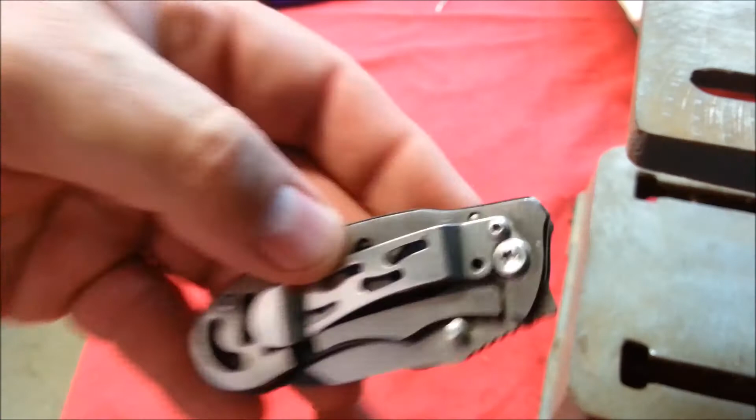We're going to have to make one of these itty-bitty fasteners. Our Through the Week project on the Crafted channel is replacing this fastener. It was stripped out and I've since lost the fastener, and I like this clip. I like using this clip to put this knife on my pocket. It's nice to access from outside without digging around in my pocket.

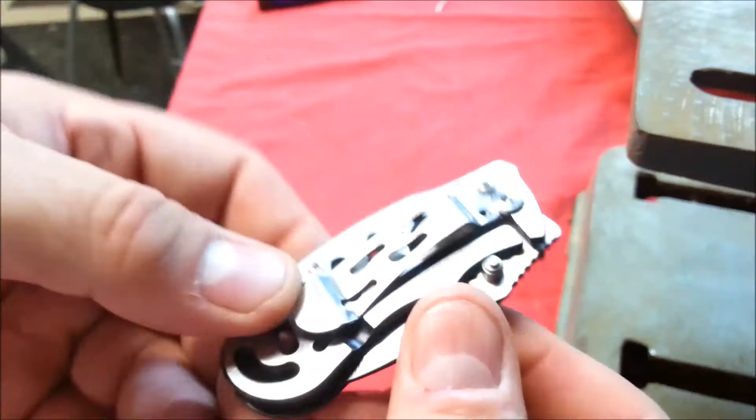But before we can start this project, it's cold in here. We're going to have to warm the shop up.

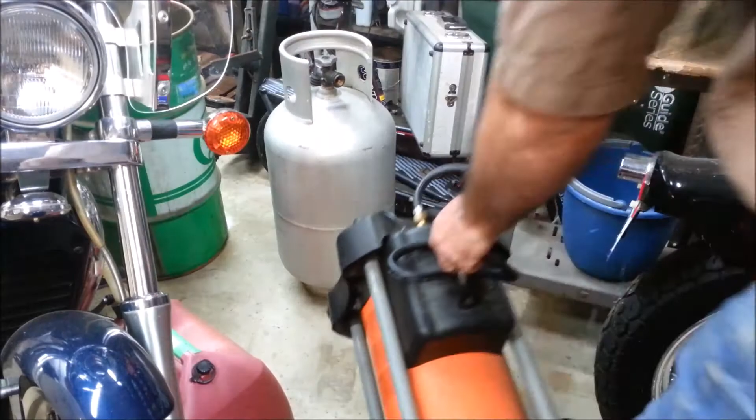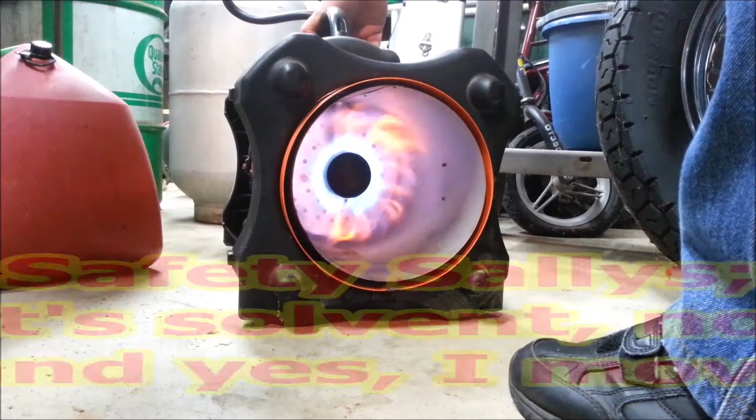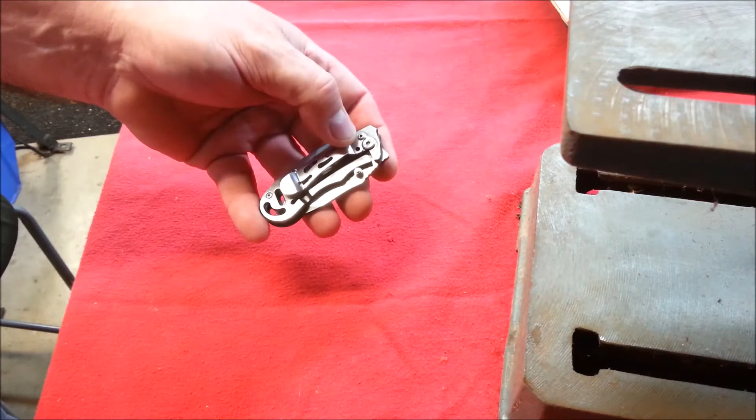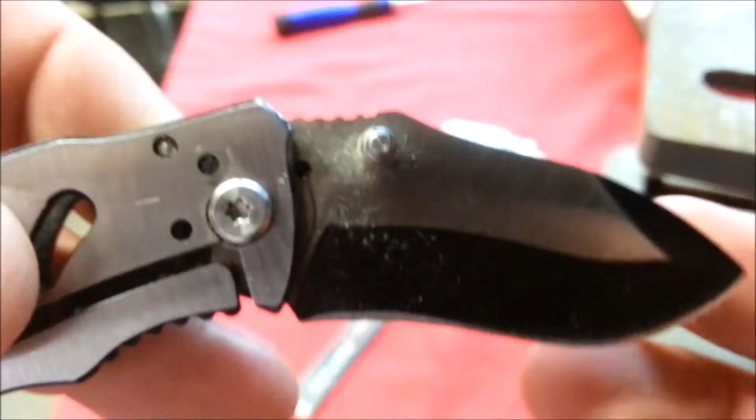Today, we're going to fix this knife, stripped out screw. We're going to have to make one of these itty-bitty fasteners. And I'm going to make the fastener out of this 4-40 button head machine screw. We see on the knife that the blade passes in front of the holes. So we can't have the fastener protruding through the scale of the knife where it might interfere with the blade.

The good fastener that we have is a 2.5 millimeter fastener. The English diameter of this thread is 0.095. I plan on replacing it with this 4-40, and we can see that it is 110, 111 thousandths. We have another issue here, and that's head size. The head on the 4-40 button head is 200 thousandths. The head on the stock fastener is 155 thousandths.

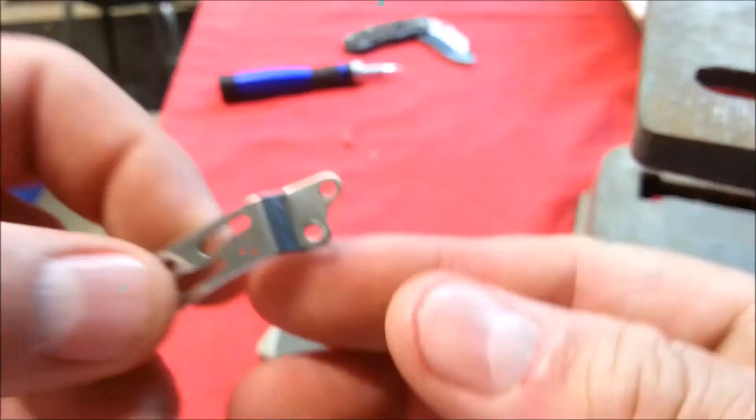Where the head diameter comes into play, the good thread that I have in the good fastener goes in this hole, and this hole here is where the 4-40 is going to go. And that head will hit this break or bend in the clip. So we're going to have to grind down the diameter of the head.

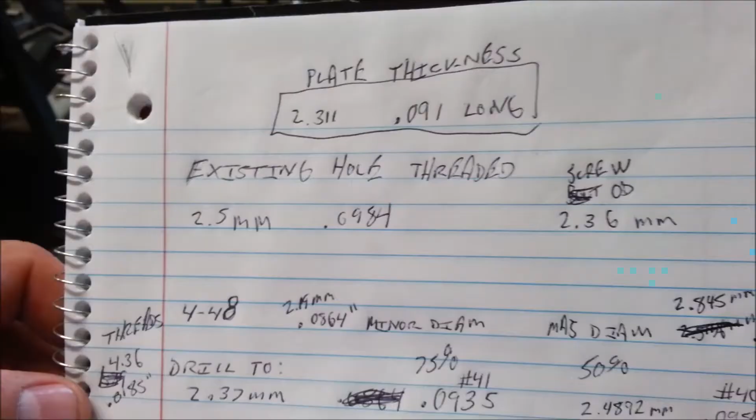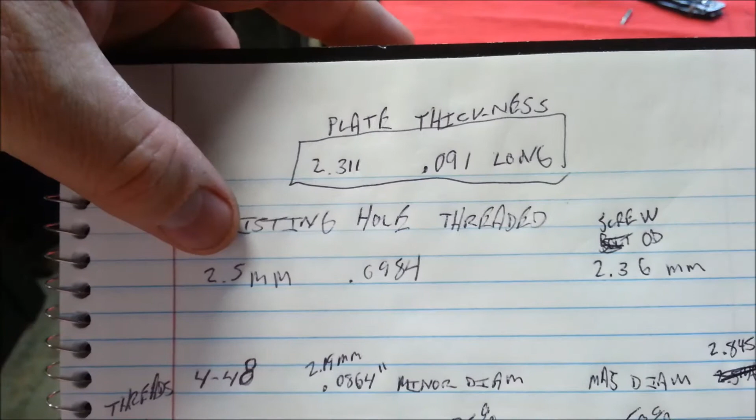Some things to consider when replacing a stripped fastener. Since we're going to be drilling the hole and making it larger, we need to take some measurements of things and figure out what sizes are available to us. The existing fastener, 2.5 millimeter, requires a tapped hole of 0.0984, and the screw OD is 2.36 millimeter.

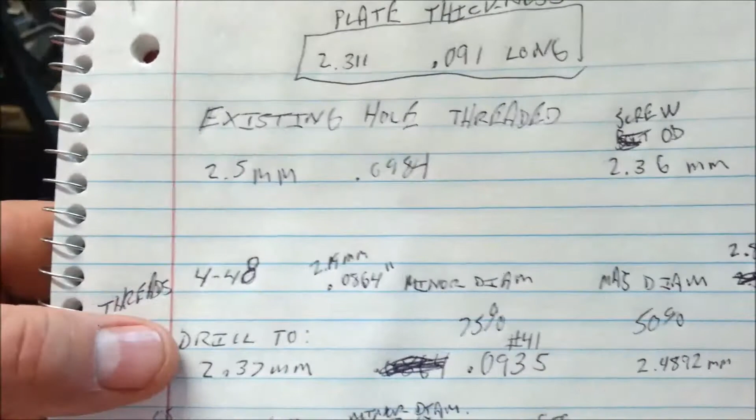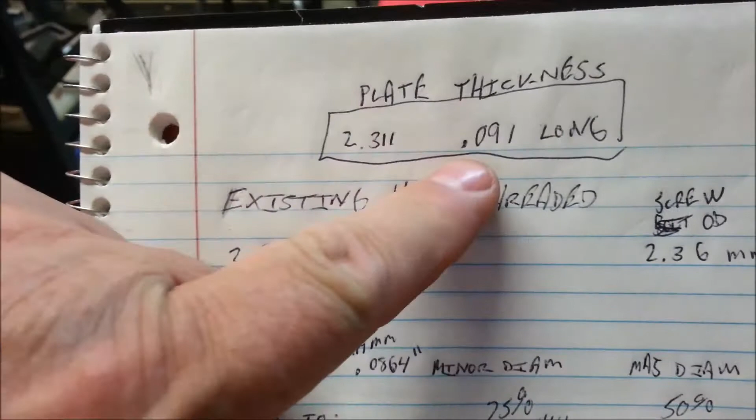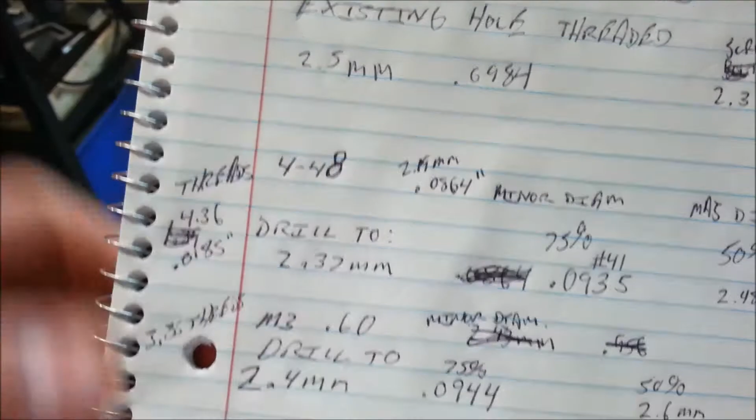Now I looked at 4-48. This would have been a great one to use. I would have had 4.36 threads in the thickness of the plate, which is about 0.091, and about 18.5 thousandths thread engagement. But a box of those is about $9. So the one I decided to go with was 4-40.

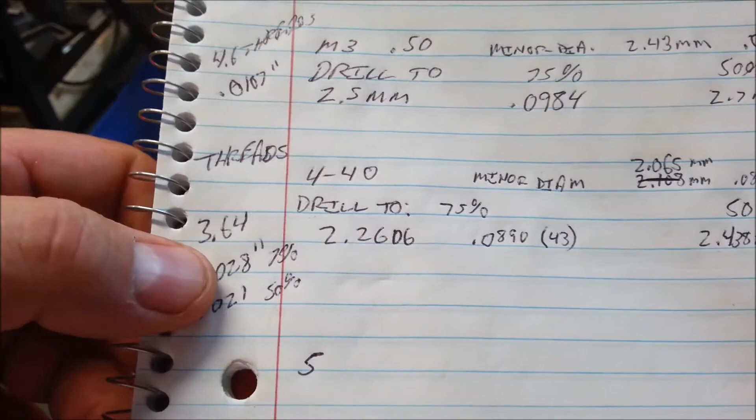This requires a 0.098 hole to be drilled, but we're really dealing with a fastener that's about 0.094, 0.095 in diameter, so I'm going to lose about 6 thousandths of this thread engagement. But that's going to leave me 22 thousandths of thread engagement, about 10 thou a side, so I ought to have a real good bite out of a 4-40. And the thickness of the plate, 0.091, there will be 3.64 threads, which I think will be pretty decent. I should be able to snug it up and not have the clip come loose.

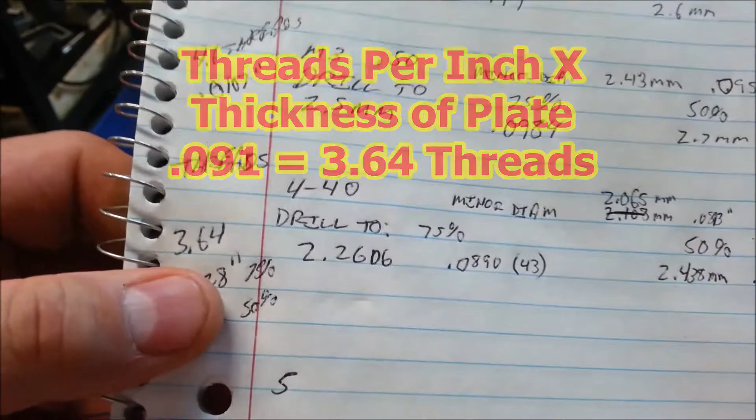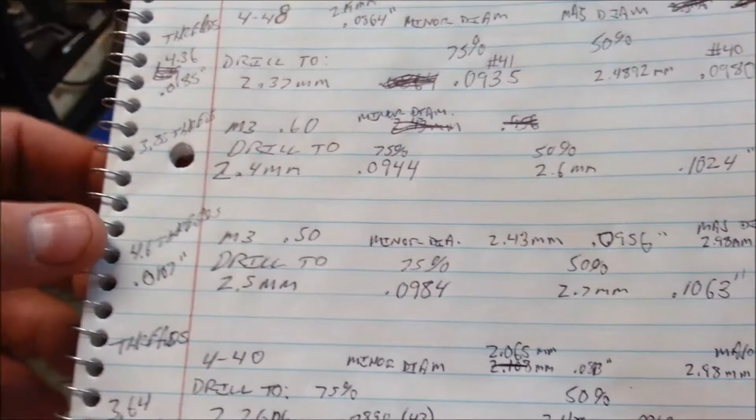Now this might seem like a lot to go through figuring all this out for a knife, but I wanted to do it right. And if you were fixing something that was really expensive and not a $20 knife, you would want to do it carefully and figure out your hole size, the hole size that's there after you drill out the threads and all that stuff in order to pick a good fastener. So here we're going to do 4-40.

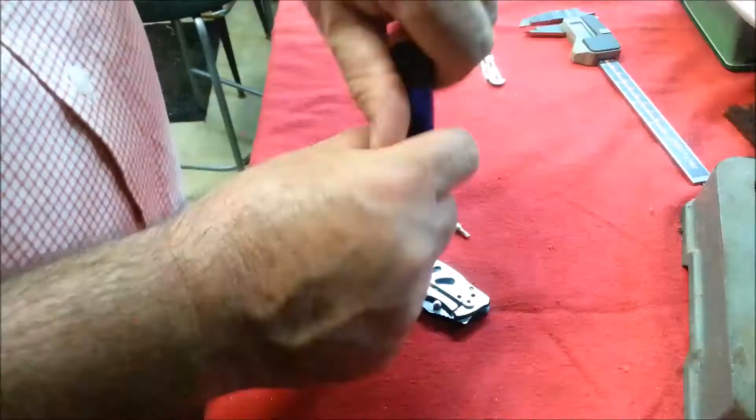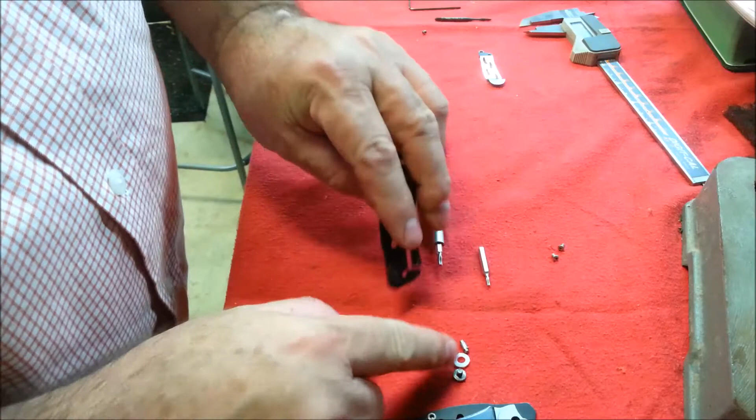So hopefully I can get this apart and back together without stripping any more threads. These screws here are actually in a spacer that's between the scales. Don't want to lose any of these either. And likely the reason this failed is crappy Chinese threading. Possibly an undersized fastener or an overcut thread in the material. Don't want to lose any of these spacers. These little nylon washers, so we'll be careful with all of that stuff.

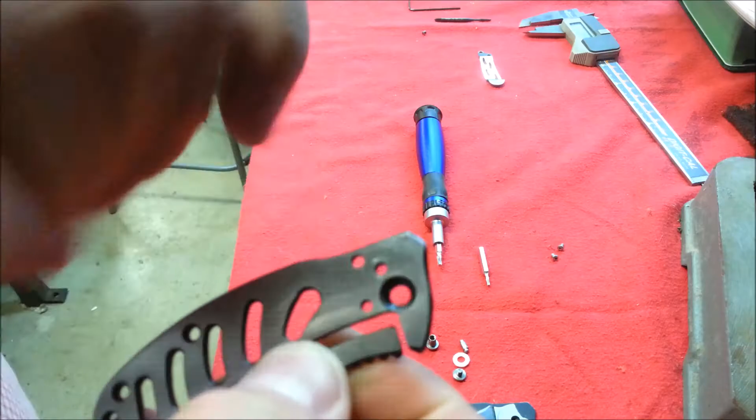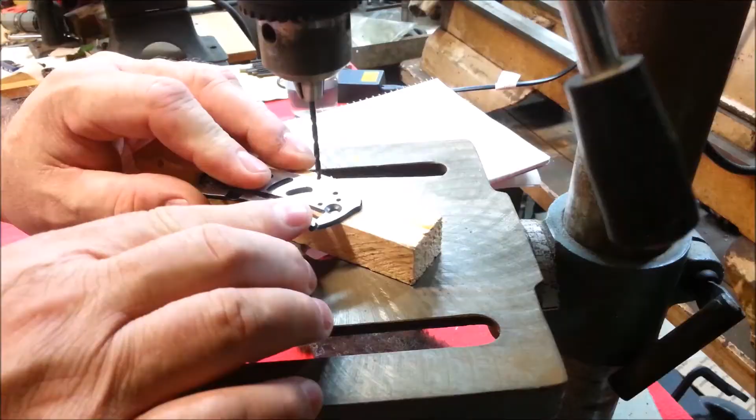And now we have out the piece of material we're going to be working on. And here's our bad hole. The 4-40 thread requires a number 43 hole be drilled. This is a number 43 bit. Raise the table up. I'm going to let the lock hang over the side here. I'm going to drill this carefully and slowly. Let it float a little bit to center.

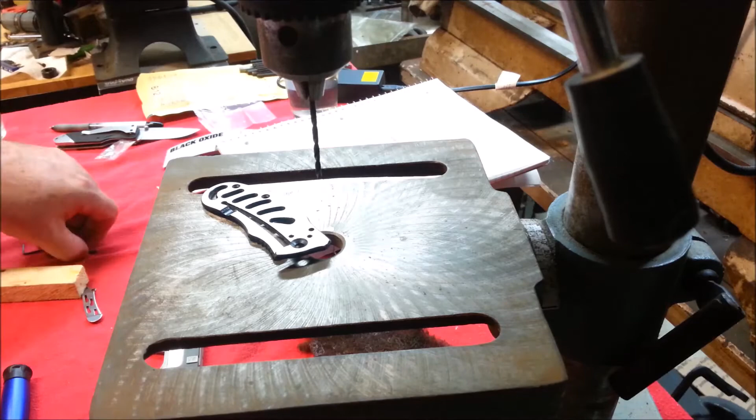We took hardly anything out of there. Almost nothing. But then again, when the screw stripped, it would have pulled metal out. It would have pulled the existing threads out of there. I'm going to install the 4-40 tap. You got to be very careful with small taps. They're very easily broken.

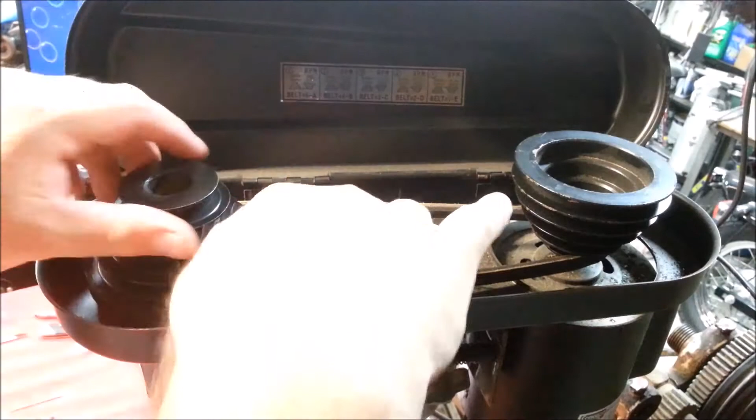I'm going to remove the belt because I'm going to just be turning the spindle by hand. I don't want a power tap with a tiny tap. That would be bad news. So here we can control it and be nice and careful.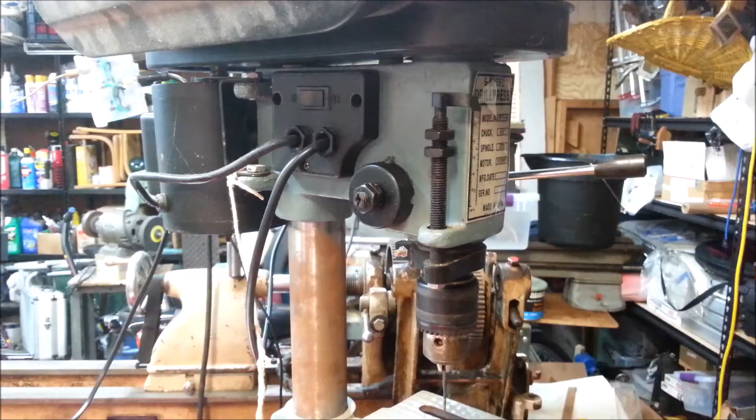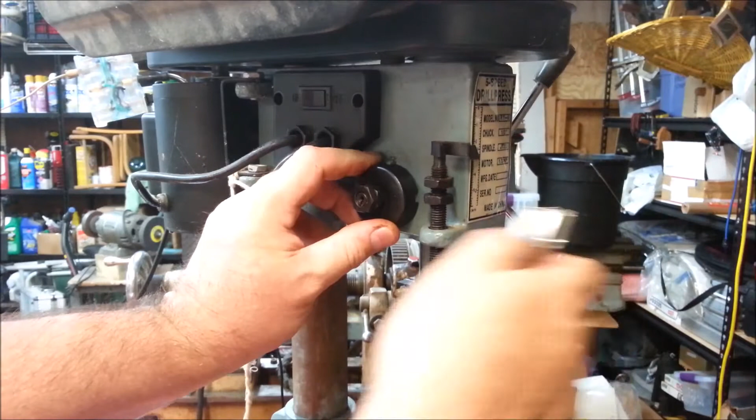I've decided to loosen the spring that causes the quill to return in the up position, so I don't have to fight with that. I could just adjust it very soft. There we go. I'm going to leave it right there, which leaves the quill. And let's put a little more tension on it. There we go. That's got it floating just above our work.

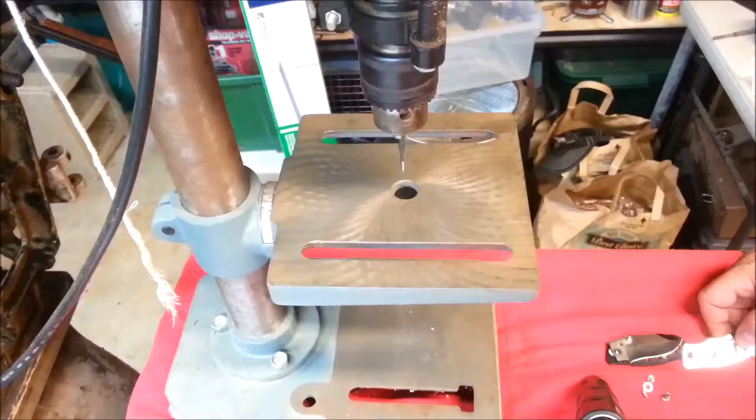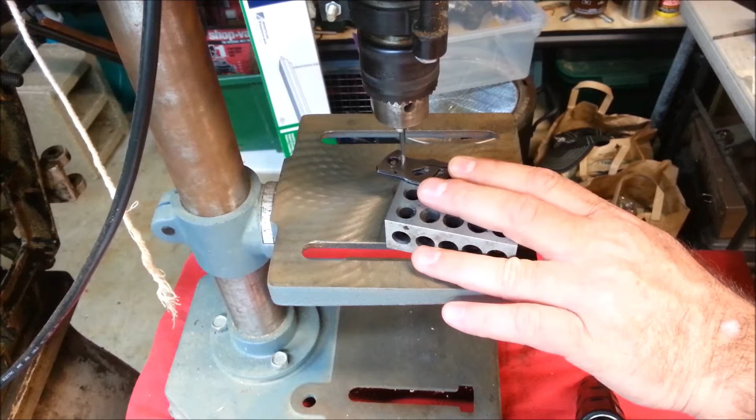I've decided to change away from the wood to one of my 1-2-3 blocks, which is a much nicer tool, and I'm going to do the tapping overhanging the block. I'm going to let the part float so it centers, and then I'm going to turn the quill with only very light pressure on the crank. I felt the tap winding up, so I'm turning it back to cut the burr off. It's very easy to break a small tap.

Tighten the chuck up. I mean, I wouldn't want it to slip in the chuck, would I? May regret that. There we go. Cut the swarf. I'm not even going to go a whole turn. Well, she does want to slip in here.

And by using my small shop drill press to hold my tap, I can be more assured of a good square hole. You could do this by hand, of course, but it would be hard to do it as straight. Wow, that's just all the force I dare put on that.

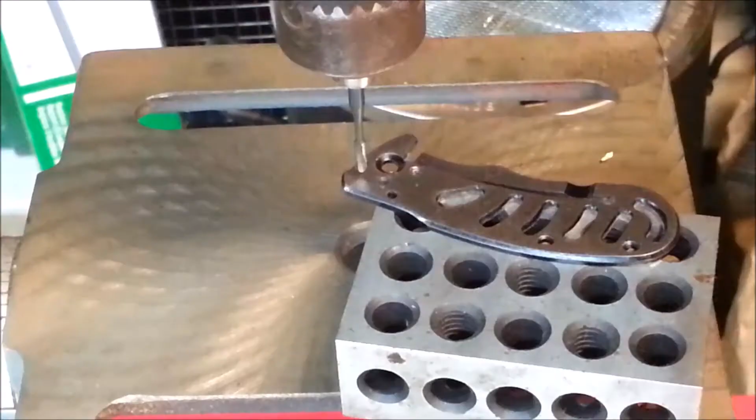Got the first tap back in here. And using a drill press to do this is another factor in not breaking the tap, because it keeps me from bending the tap, which I might be more prone to do with a tap handle. Yeah, I think this is the better tap.

I think I've got the thread formed. It's a little snuggly, but I think it'll do fine. Head doesn't go quite down to the surface, but it's going down below the thickness of the clip. So I think I'll be fine. I think the threads are finished well enough up to the head.

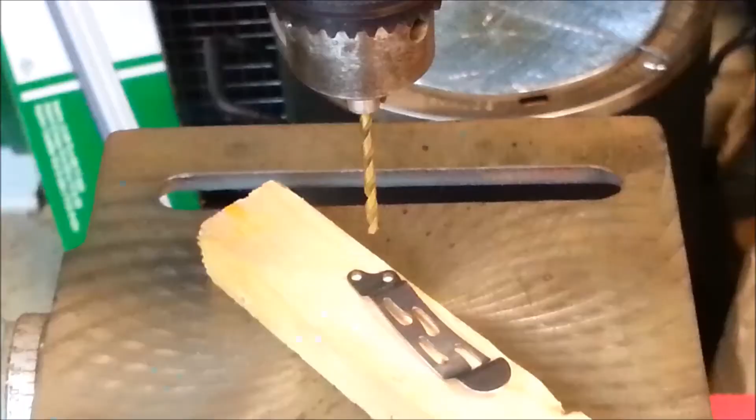About to do something a little more dangerous here. I have to drill this hole out. It's about, I think it's 0.098. This is a number 36 or 34, I forget. A 111 drill bit. This fastener, the 4-40 that goes through here, is 110 and a half thousandths. So this is half a thousandth bigger. I have to slightly open that hole up to clear the fastener.

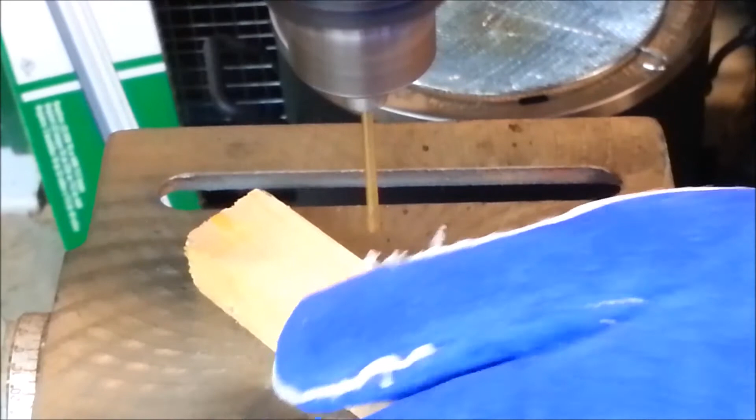And I've got a good leather glove here, just in case this grabs and yanks out of my hands. Nice high speed. Yes.

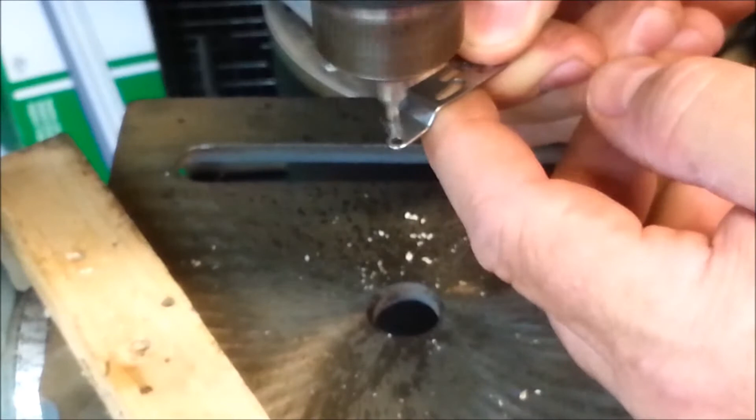So how do we get this large head on the left down to the size of the little head on the right, or closer to it? I've got an easy trick for that, and stay tuned because I got a really good trick for how we're going to shorten the bolt next.

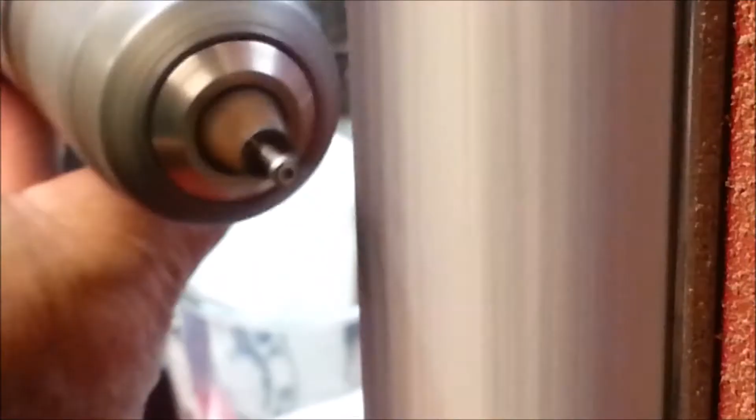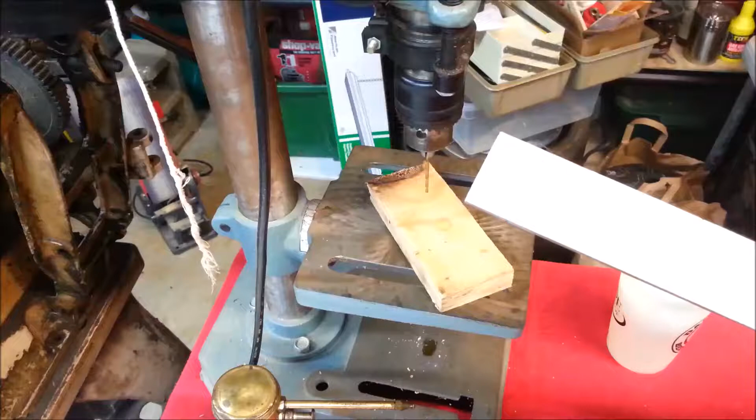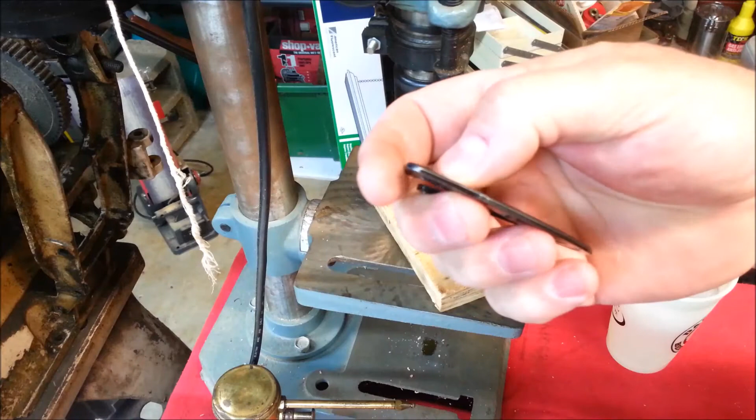I'm going to use this piece of O1 tool steel to shorten the fastener. Now, how am I going to do that? Well, it's going to become obvious in a moment here. Cutting a bolt off very, very short is a problem, and especially if I want to do it accurately. I want the bolt to fill up the whole thickness of this plate. This plate and this piece of tool steel are within a couple thousandths of exactly the same thickness.

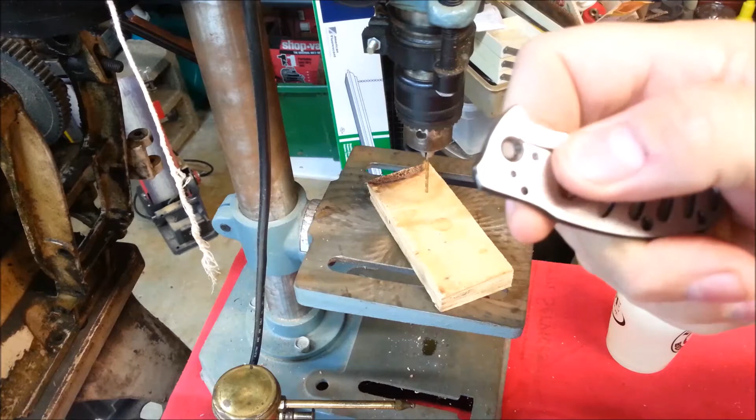Now, something else. Earlier, I had difficulty threading this hole. I almost broke a couple of taps. And the mistake I made, and I was being aggressive at trying to get a lot of thread engagement, is I used a number 43 drill bit to drill the hole, which gives you a 75% thread. And that's normally only used in plastics or possibly aluminum.

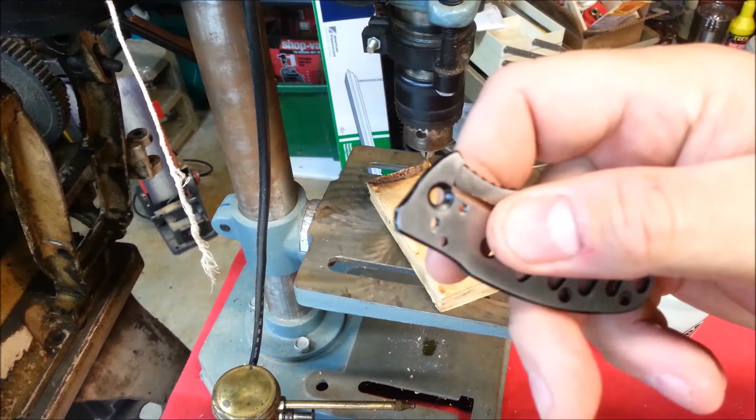And I should have used a 42, which is slightly larger, that gives you only 50% thread engagement, but it's normal for steel fasteners. So I've got the number 42 drill bit installed in the drill press now, and we're going to drill this hole.

And never fear, this is metal for knife making, but we're never going to use the corner here because that's always going to be in the curve of the tip or something. And even though it's O1 tool steel, it hasn't been hardened, so it's still very soft and machinable.

A little bit of a low drill speed, but we did just fine. Notice we don't have any squeaking. It's going right through it. I haven't even had to break a chip. Let me break one though, just to be careful. Piece of cake. We all make mistakes. I was being greedy trying to get as much thread in the knife scale as I could get. We will thread it into our hole here with the tool steel.

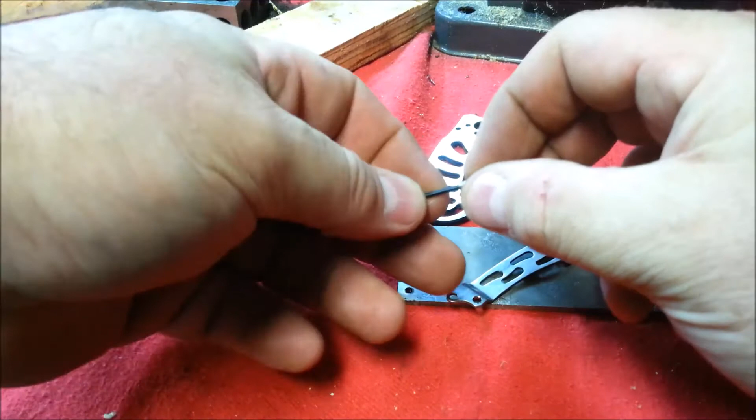I think it's done. Barely see the end of the fastener. Touch this a little bit, but still a useful piece of material. There it is, one short fastener.

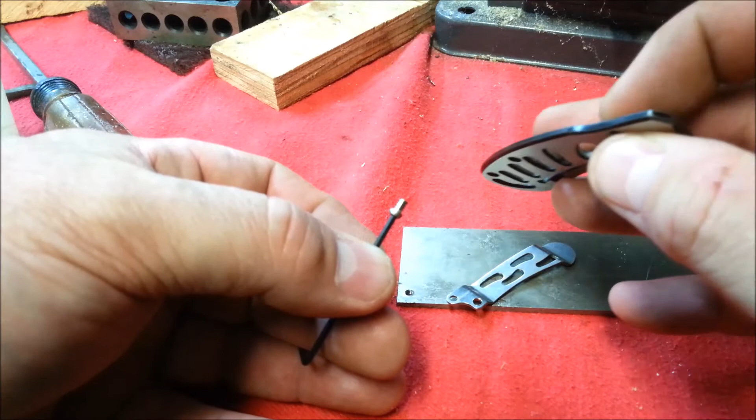Now my fastener is a little longer than their fastener, but I'm going to fill up the thickness of this plate. One of the reasons why theirs stripped out is it probably was a little shorter than that. Maybe it only had one thread or two. Hopefully when I put this back together, I won't strip one of the original fasteners here. But if I do, I can fix it.

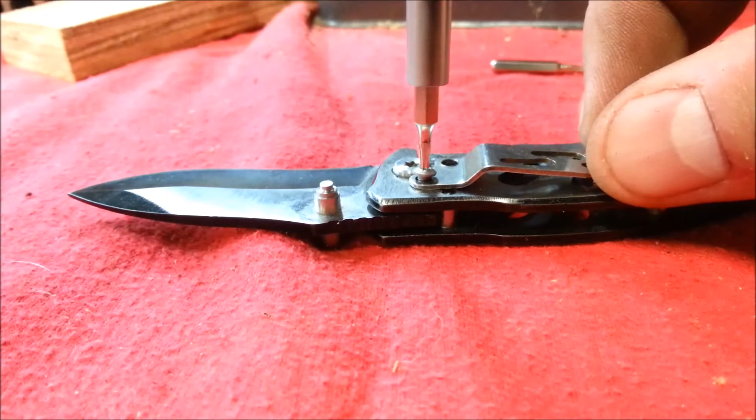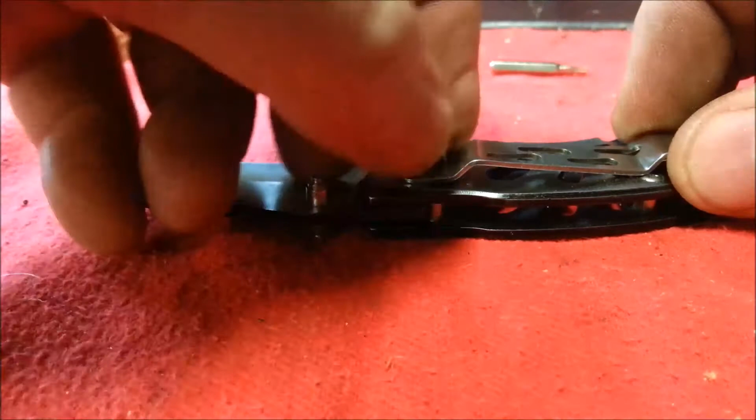This is the good original fastener. That takes a nice torque. And here's my crafted made fastener. Have this lined up properly. Let me loosen this one so we're not fighting it. There we go. Got it started nice.

Oh yeah, takes a good torque. That one I want to be careful with how much I torque it. So there we go. Stock appearing. One's a hex and one's a Torx. We've repaired one knife. That's good and tight.

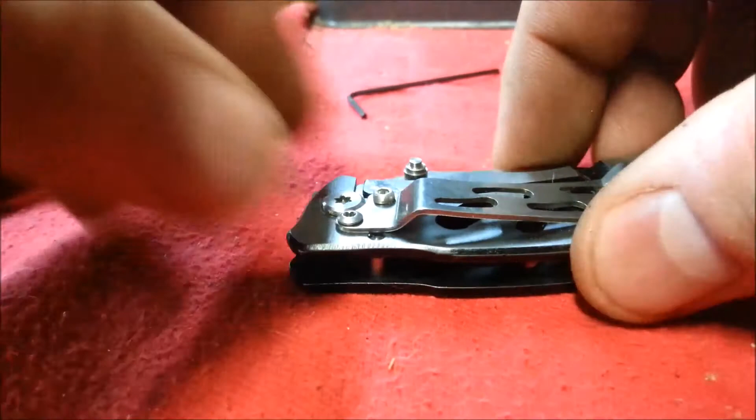So there it is, folks. We made a stock appearing fastener out of a bigger fastener, got it rethreaded. We got our pocket clip installed again. We have a nice pocket knife to carry around. Won't have to worry about losing it, or the fasteners, or the clip. Short project, didn't take much time.